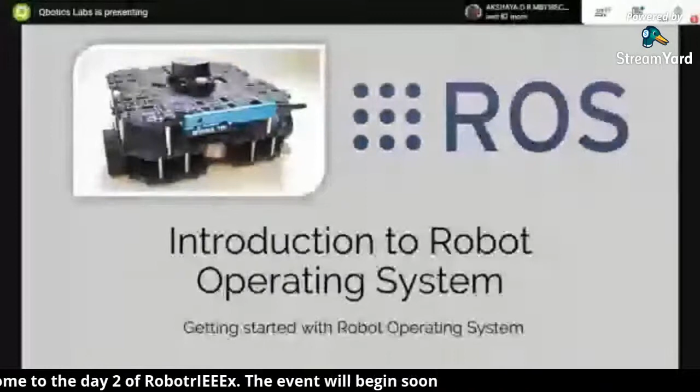So today we are planning to discuss about robot programming and a platform called Robot Operating System. I'm planning to make this session as interactive as possible. In the Google Meet you have the chat box. So what you have to do is when I ask some questions, you can comment it, instead of unmuting your microphone.

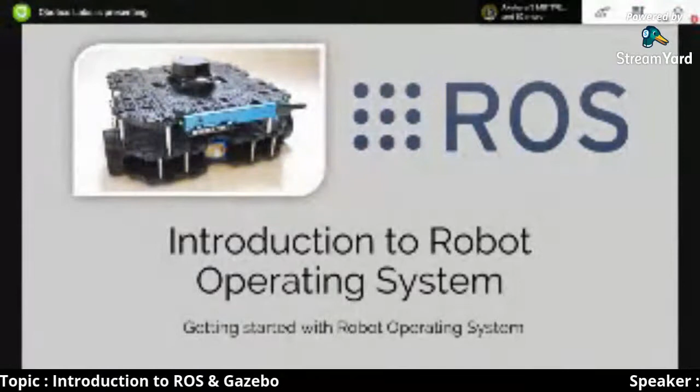I think already one guy is saying a hi, wonderful session. Oh, I think he already grabs all the topics of this talk. I think anyway, I hope the people joining this talk may be having some interest in robotics.

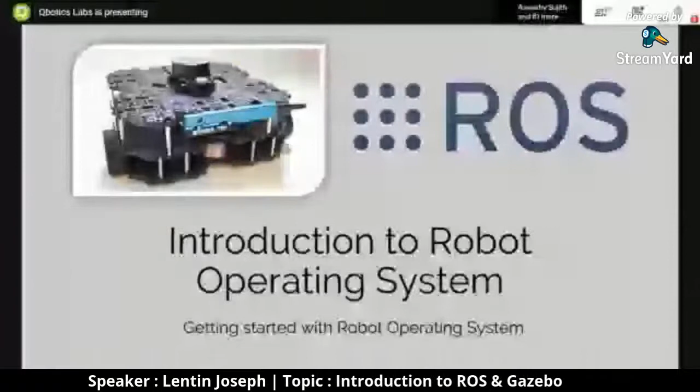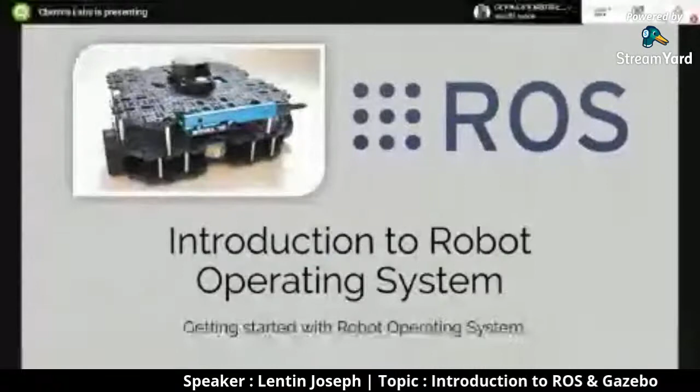I will ask a few questions during the talk, to make this talk as much as interactive. And I also want to take 15 minutes for the Q&A, because this topic, robot programming and robot operating system, is a vast topic. So I'm only giving some introduction on this topic today. In the Q&A session, you can ask more questions related to your project. You don't need to limit the questions to robot programming and ROS. It can be anything related to robotics, okay?

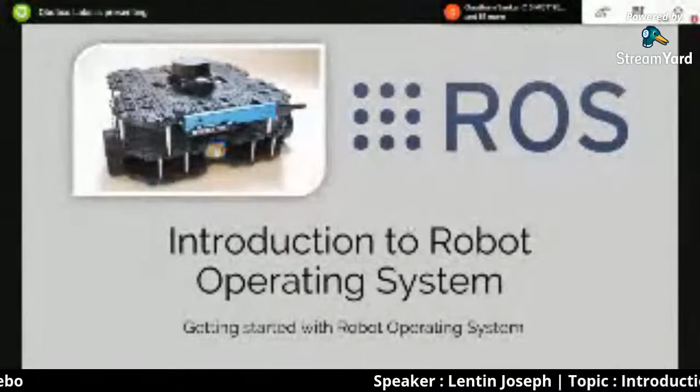Yeah, now we can start. So just an intro about me. My name is Lentin Joseph, and I'm working as a robotics software consultant. I'm running a company called Qbotics Labs, in Kochi, and I have an online blog called Robocademy.

Mainly, I'm sharing tutorials regarding robotics and robot programming. Then I have a few years of experience working at some robotic startups, as well as Carnegie Mellon University in the US, for some time. Then I have a masters in robotics, and I also spoke at TEDx. I have written 8 books on robot operating system, mostly related to Python, C++, ROS, OpenCV, those topics.

So these are some of my books: Robot Operating System for Absolute Beginners, Learning Robotics using Python. Mostly the books are related to ROS programming. And these are some of the books I reviewed. I didn't include all the names, but these are some of the titles.

So I'm planning to give an introduction to robot programming and introduction to ROS. Then we can see some of the steps for installing ROS, then ROS architecture, communication model, client libraries, etc., if we have enough time, then we can cover all those topics. And at the end of the class, I think I can show you some demos also. So that is my plan.

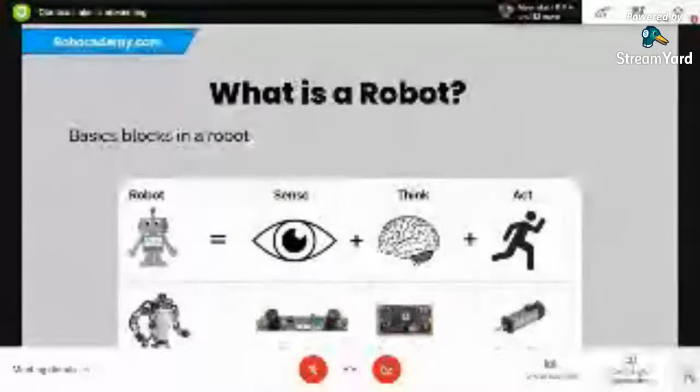Okay, so let's start. So how many of you are already working with a robotics project? You can put the comment in the chat box. Just let me know how many of you are working with a robotics project or with some kind of robots. Let me know. I think there are 84 people. So is there anyone who already works with robotics, or how many of you are interested in learning robotics? Just give a comment. I think nobody's commenting. Yeah, it's coming.

I think few of you are interested. I think I'm only getting 2 comments. Okay, fine. So I assume that some of you have interest in learning robotics.

So I can start with the basic blocks of robotics, robot mainly. Yesterday, I think you already covered the basics of robotics, robots, and there was a live session yesterday, right? But I just want to start from here. So the main modules of a robot are: it will have a sense block, a think block, and an act block. The sense block consists of the sensors, meaning the cameras, then the depth camera, then the lidars, laser scanners, etc.

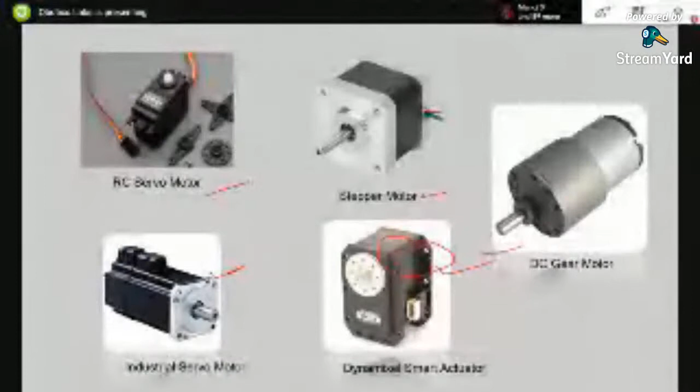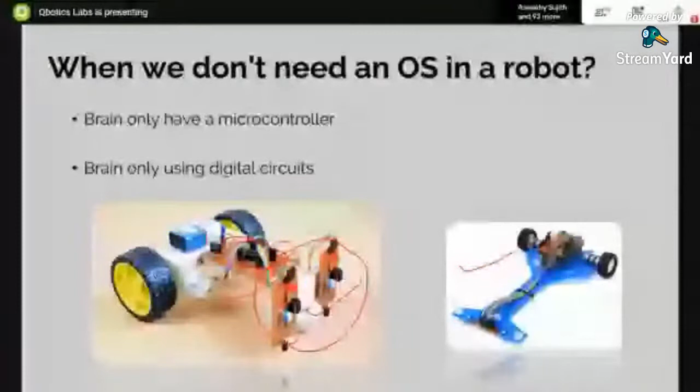So in this case, do we use a fully fledged computer or laptop? No, right? We only use some microcontrollers.

But if you are working with a complex robot, for example, the popular robot that I can say is Asimo from Honda. I think you might have seen Honda Asimo, which is a humanoid robot that can do most of the functionalities like a human being. Or you may have heard about Sophia, that is again a popular robot. So those robots we can say are complicated or complex because they have two robotic arms, then a head, and some sort of intelligence.

So in those kinds of robots we may need more computation power, not only microcontrollers but also a PC. It may be a workstation, it may be a single board computer, it may be a mini PC like Intel NUC. So there may be a PC along with the microcontrollers.

And inside that there will be some operating system, obviously. So inside a PC, there will be an operating system, right? So I'm just saying there are robots which only work with microcontrollers or digital logic circuits, or with a PC, fully fledged, maybe a laptop or a mini PC or something. In complex robots, a PC may be acting as the robot's brain. The reason is there are a lot of computations to perform, so that's why we need a PC.

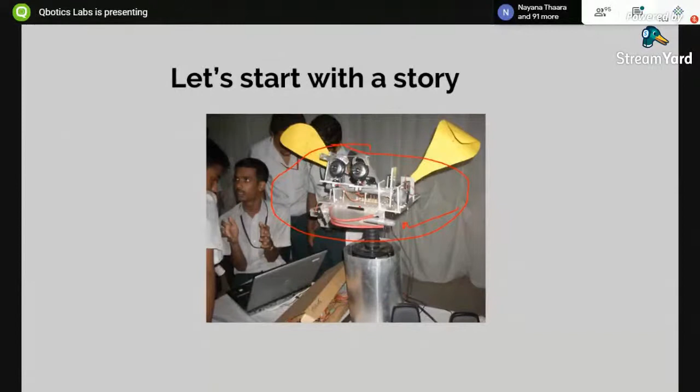So it's like an animal kind of head, with two eyes. There are lips here, these are the ears, there are two ears, and this head can move. You can see a laptop here, two speakers, an embedded board here, and another laptop here. So this was my final year project, and this was me when I worked with this project.

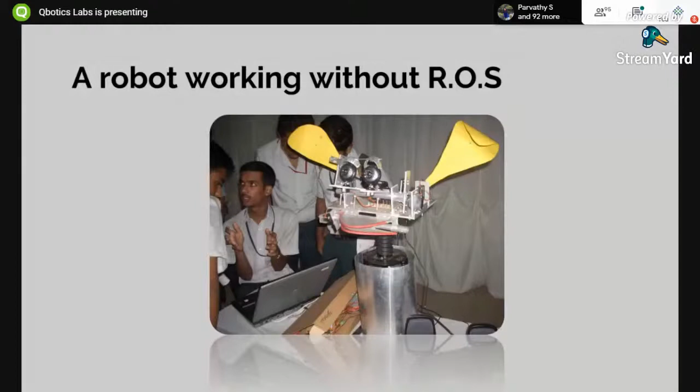This robot was not powered using ROS. This was the configuration: it has 12 RC servos, 2 laptops, and 2 cameras. There was a provision to interact with people using AI, speech recognition, face detection, and motion detection. I used Python and C++ to program.

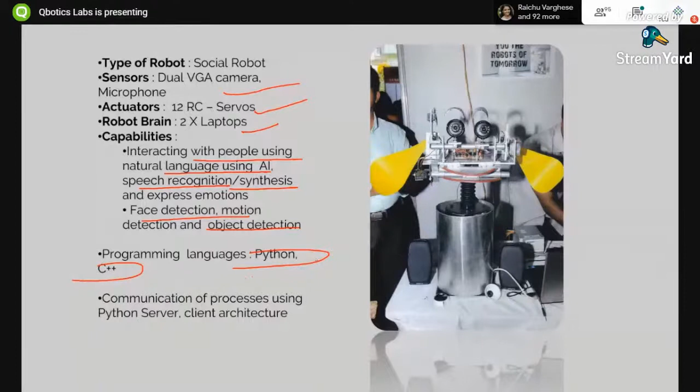This pic was taken during an exhibition. So this was the main challenge I faced. Simply, there are different programs running on these two computers. You don't need to worry about the names - I can simply say there are different programs, like one for face detection, one for motion detection, one for artificial intelligence. So there are different programs running.

And these two programs are running from different systems - I mentioned there are 2 laptops. So how do these programs communicate? At some point, the face detection program has to send commands to the AI program, and the AI program should send commands to an Arduino program. The Arduino program commands the robot, and it will move. So I have to establish some connection between these programs like this.

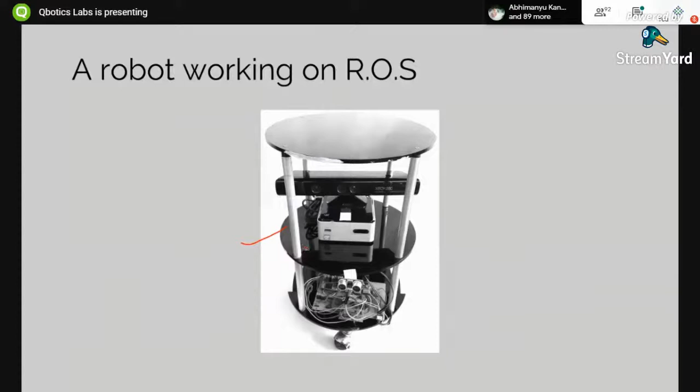So the issue was - you can see the components, like this is the Intel NUC that I was talking about. There is a depth camera here, and there are some embedded boards here. So these are the main components.

And the function of this robot is it can go from A to B. So this is a point called A, and if we command the goal position here, this is B, then the robot can path plan and avoid obstacles and reach B. I used ROS and Python C++ programming.

So when I used ROS, I could solve all the issues I faced during my final year project. The main thing was I could solve the inter-process communication - that's the term we use for communication between two programs. Using ROS, it provides an easier way to communicate between two programs. So that is a main application of ROS.

So you can just recollect the points I mentioned. ROS is a platform for doing inter-process communication. For example, you are running a program in C++ or Python called X, and you are running another program called Y, and also there is another program called Z. These programs are running independently.

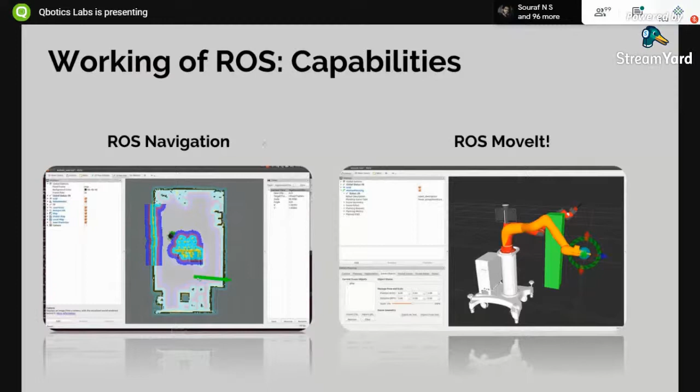I just want to show you some demos, then you can understand. The important capabilities of ROS are navigation and MoveIt, so let's show a demo first. Let me reduce the volume since it's a video. First, I want to show you the navigation demo—this is a simulation, a Gazebo simulation. You've seen what Gazebo is, it's a robot simulator.

In this demo, you can see a robot being used in a warehouse. You can publish a goal position, command the robot to go to some position, and the robot will go there autonomously. So this is the goal position that you have commanded.

So what the robot does is create a path from the current position to the final goal position, then it will avoid the obstacles. There is a virtual wall here, meaning there's no physical wall, but you can add one virtually, and it is avoiding that and reaching the goal position.

A lot of students are doing this autonomous robot project with some other application. In order to do this, you don't need to code at all. It's all about taking this navigation stack and customizing it. ROS already has these features, you just take the package, customize it, and it's ready to go. So this is one capability already available with ROS.

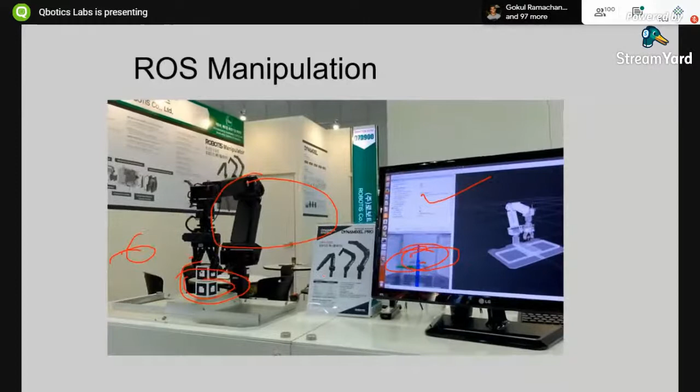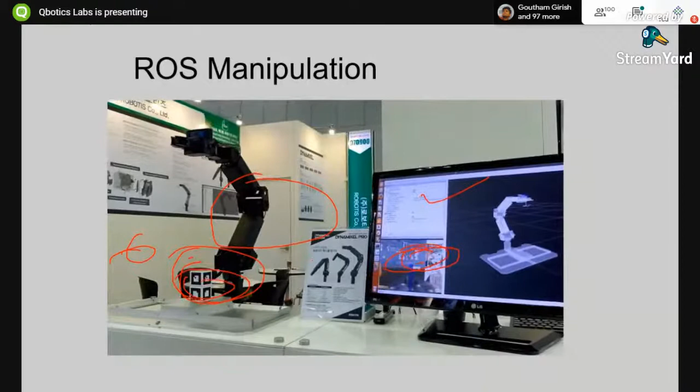These things can be implemented using ROS. It's not difficult, you can customize it like the navigation stack. So if you want to implement this kind of stuff, you don't need to write your program from scratch, you can use ROS.

What is the purpose of creating a 3D obstacle map around the robot? The purpose is that if the robot moves from A to B, say taking an object from A and putting it in B, if the robot doesn't know about the environment, it may collide with it. Because when the robot plans its path from A to B without knowing the environment, it can collide. So the perception stack in ROS gives the ability to perceive the environment, so the robot can see it and avoid obstacles.

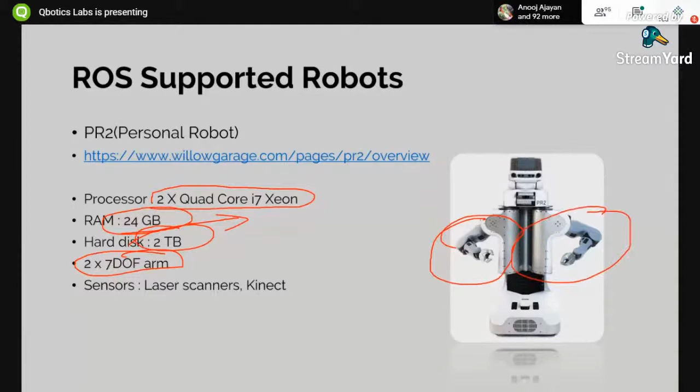This is ARM, and it has a lot of sensors - this is one sensor, this is another. And this is the Turtlebot, another cheap alternative in order to learn ROS and do research. So these are other robots supporting ROS.

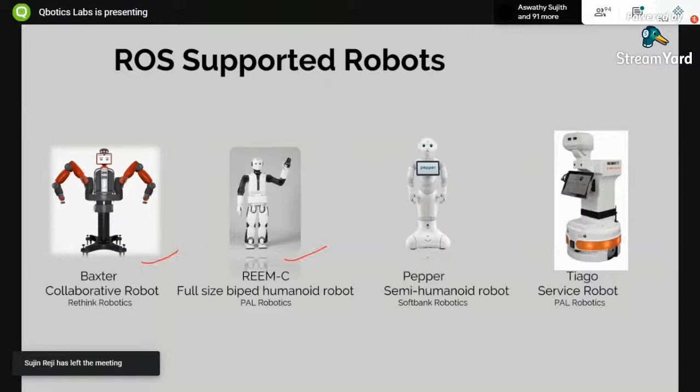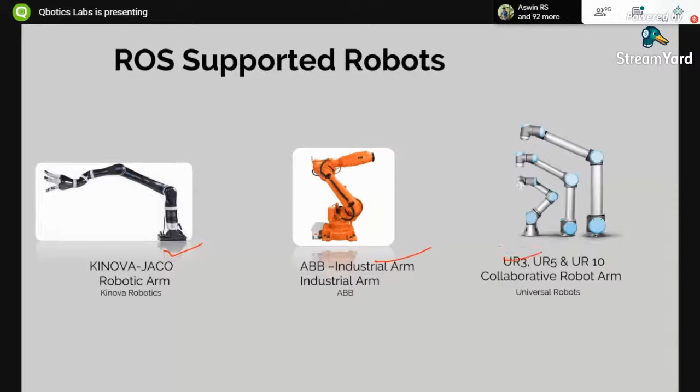I'm planning to show you a demo that was created using the ROS framework and executed on the PR2 robot. Let's start. I'm just muting the audio.

The basic idea is these engineers are working in Willow Garage and they need beer, for chilling. So they created an application. The application is simply fetching the beer from the fridge. And who is doing the job? The robot does. Let's watch this demo.

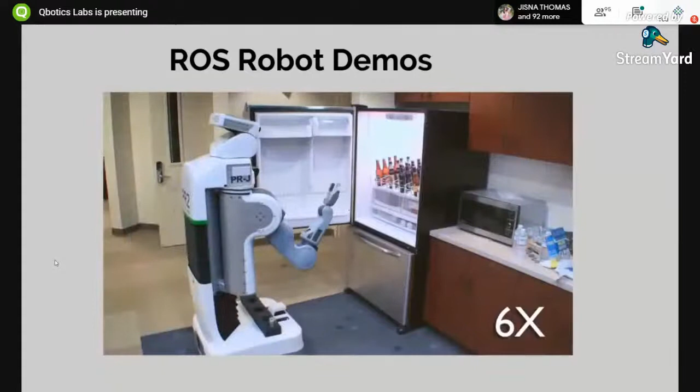So these guys are creating software using ROS. If anyone needs a beer, they can order it, and the robot will deliver. This is a beer ordering interface - you can see it opening the fridge. All these things are being done autonomously, and the robot is taking the beer.

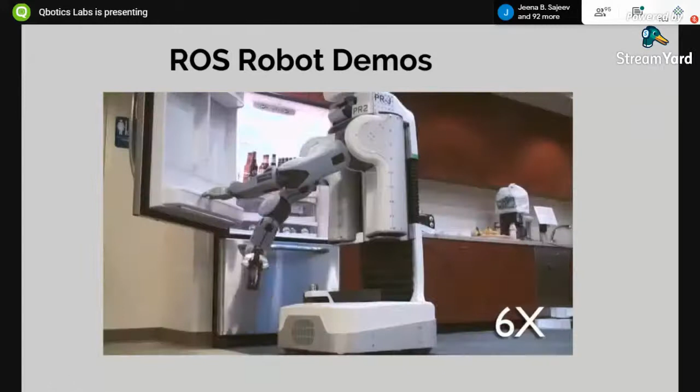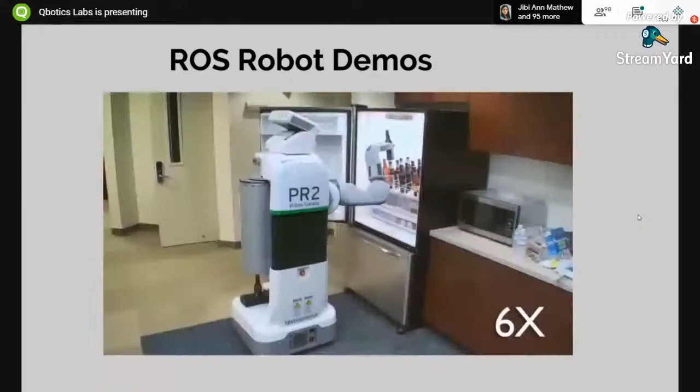Just check, it is running on 6x speed. So it's opening the fridge for maybe 5 minutes, I'm not sure, and then only it can take the beer. So don't try this at home anyway - this is only for demonstration purposes.

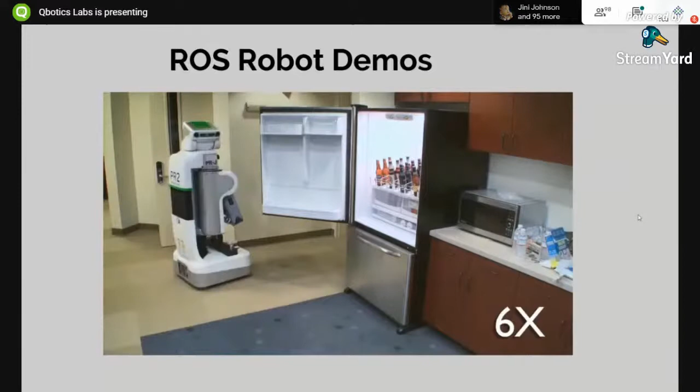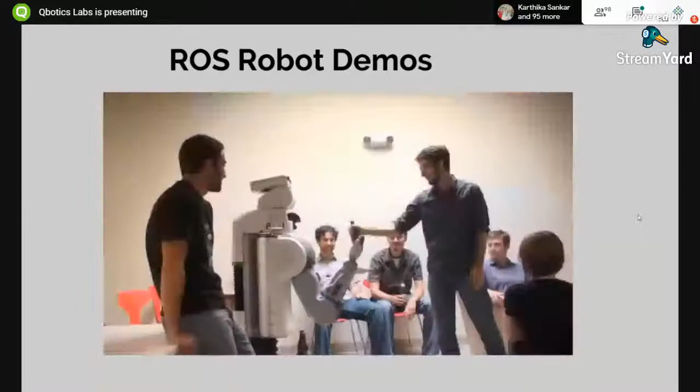After taking the beer, it is closing the fridge, then checking whether the fridge is closed properly. Then it's delivering. The good thing is that it can even open the lid - you can check, it can open the lid. Yeah, it can do much better than us, obviously.

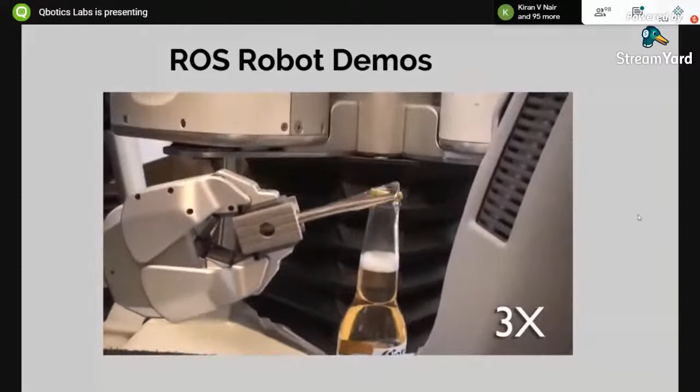Yeah, so this is a demo, and this is completely done in ROS.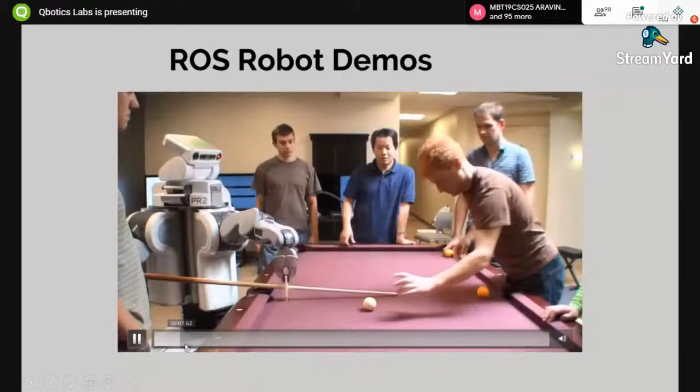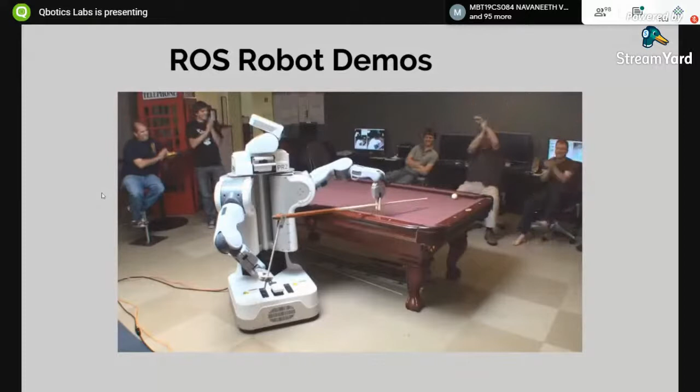Coming to the next demo, the pool shark. Basically, the robot is playing pool. These engineers created a software based on ROS, and using this software, the robot is able to play pool.

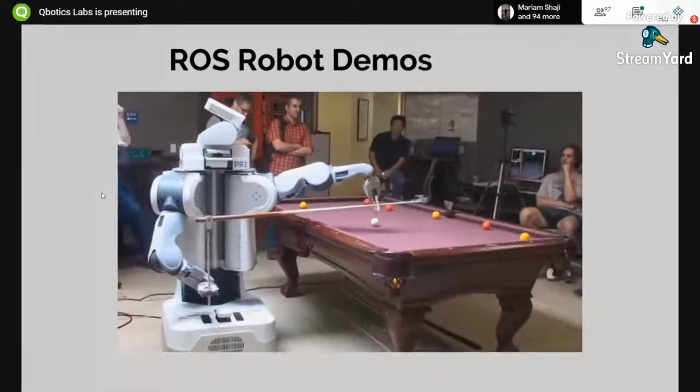And the good thing is that it's not randomly kicking the ball. Instead, there is a strong algorithm running in the backend that is detecting the balls. You can see the balls are detected, and it is planning the path.

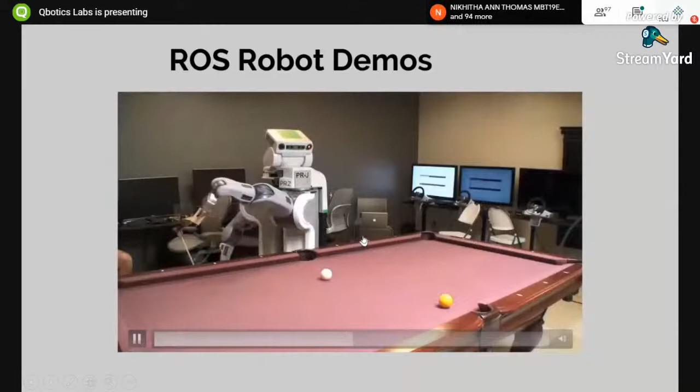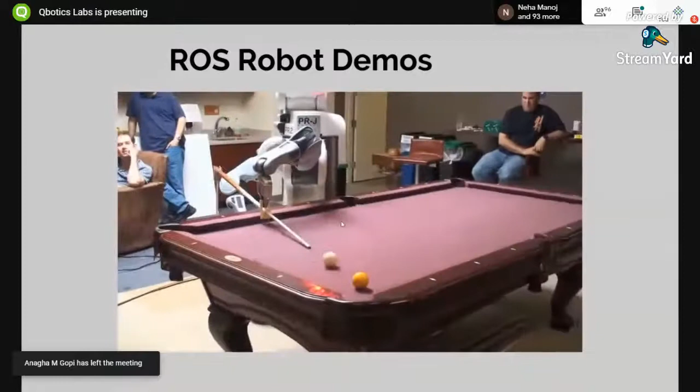This is the detected board with balls, and the robot can actually do path planning like this. It can iterate, it can simulate - like if it's hitting the ball at a particular angle, then where should the ball go. We can't do that, only a robot can do that.

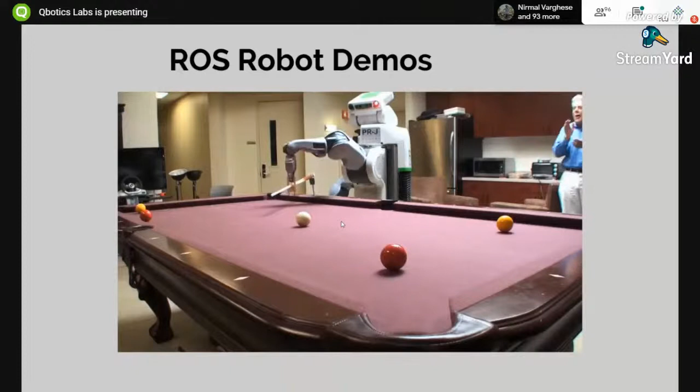So this is another demo, but the robot will fail at some point, obviously. So yeah, that is the pool shark.

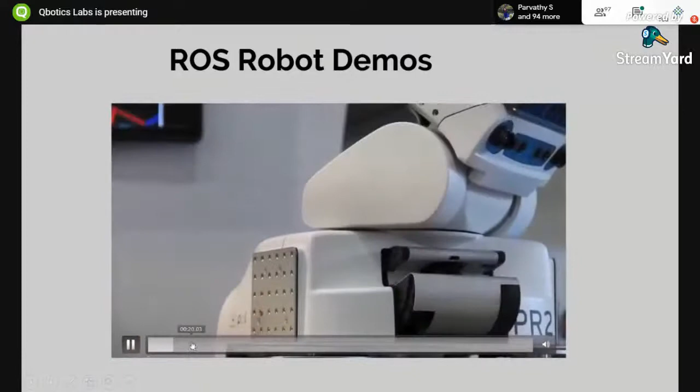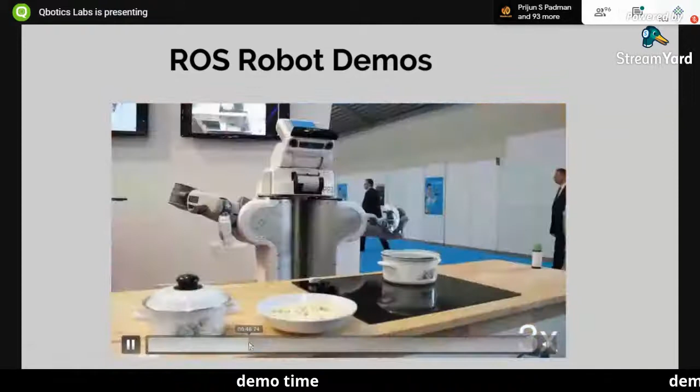Now, next demo, the PR2 is making popcorn. This is very interesting - these guys have done this demo during an exhibition. Basically, the PR2 will take the popcorn corn, put it in the heater, and prepare it.

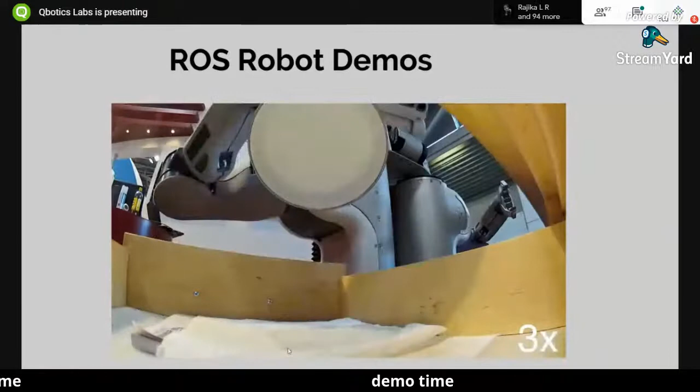You can see the robot is changing the knob and doing the work.

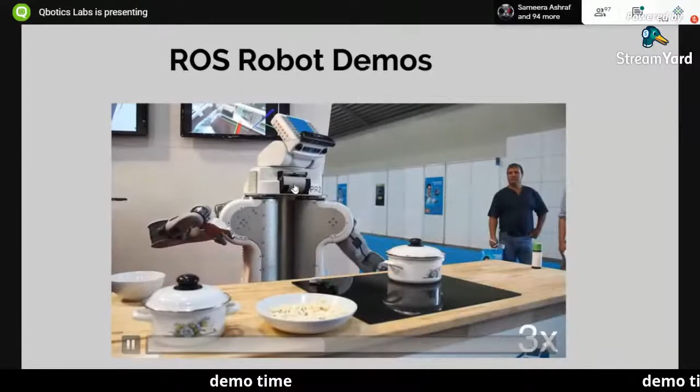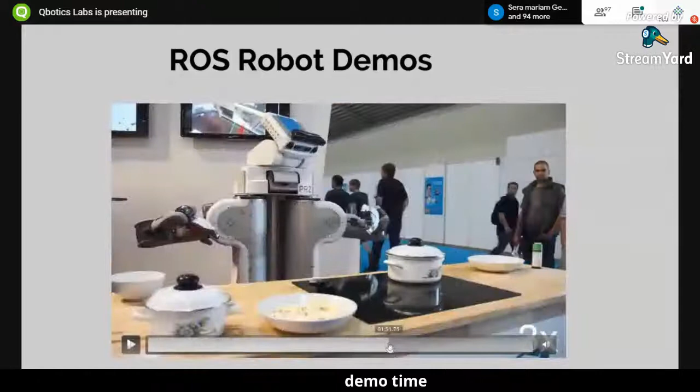Let me just seek ahead. So this is basically a heater, and you can see a sensor that is basically a laser scanner.

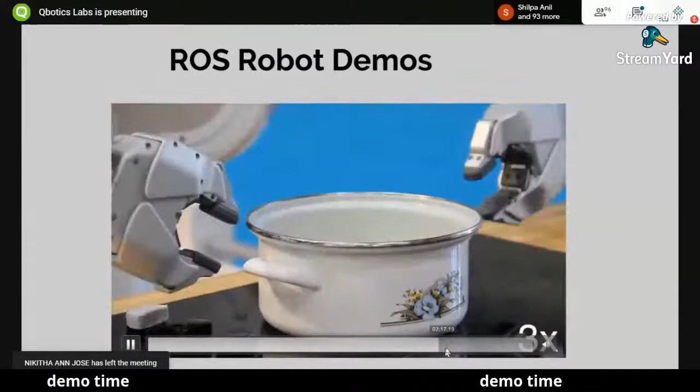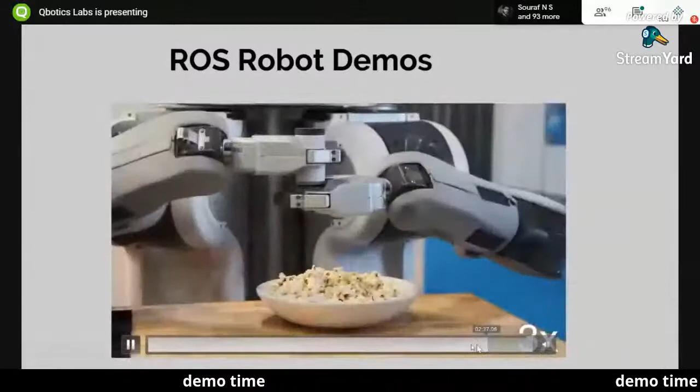Now the popcorn is ready, and it's taking it and putting it in. And finally, it will put salt on it. So these tasks, all of this demo, is done using ROS. So this is another demo.

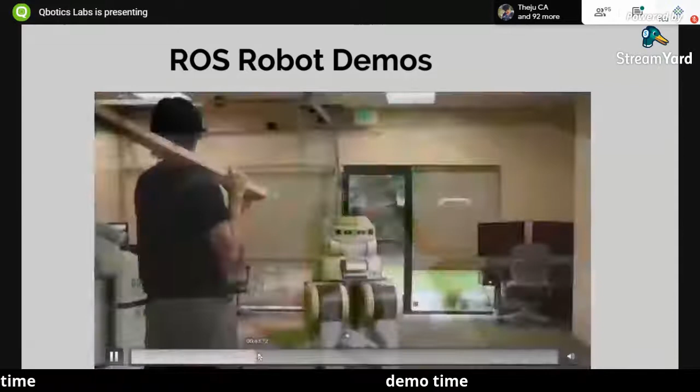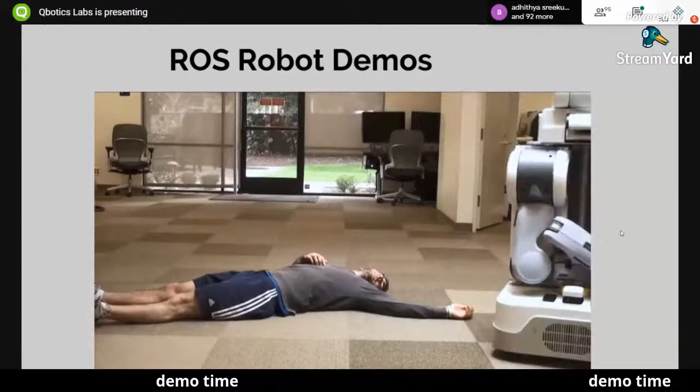This demo is of the ROS navigation stack. I can show you that the robot is moving autonomously, and what happens if somebody falls in front of it - it can avoid it autonomously. So this is again done using ROS.

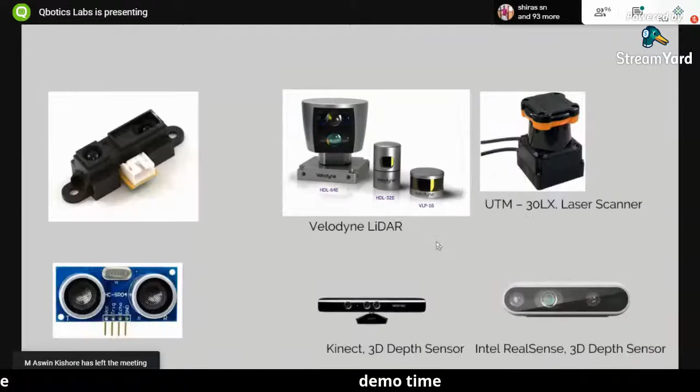There are a lot of demos, but I'm just skipping ahead, and I want to show you some sensors next - some of the sensors supporting ROS, and some boards. Now I'm going to the important section of this - how these programs can communicate with each other using this ROS functionality.

Regarding the future scope, software is a main, important aspect in computers and also in robots. Bill Gates actually transformed the computer industry, right? He released the Windows operating system, and also Linux transformed it. Similarly, ROS is actually transforming the robotics software industry.

So there are a lot of opportunities in research, and companies are looking for ROS developers, especially in the US, and in India also a lot of companies are looking for ROS developers.

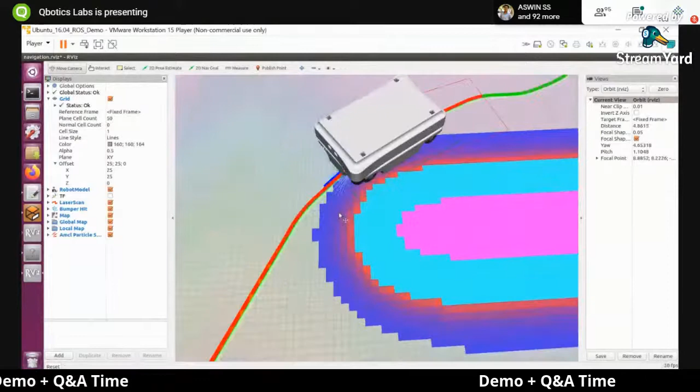So you can see the path planned by the robot. You can see a green path that is called the global plan, and there is a blue color which is the local plan. So you can see the robot is planning the path and moving over the path, and it's reaching the destination.

So these kind of projects can be done using ROS. Let me put the goal position here, inside the room. Let me see what happens.

See, it's planned a long path. And you can see the robot is moving in simulation. Maybe I can put a random obstacle here. Let's see what happens. So it's detected that obstacle.

Actually, it should automatically avoid that obstacle, but you have to fine tune it properly. I'm not sure what happened for this robot. So you can find the obstacle here. It's taking a different path in order to avoid that.

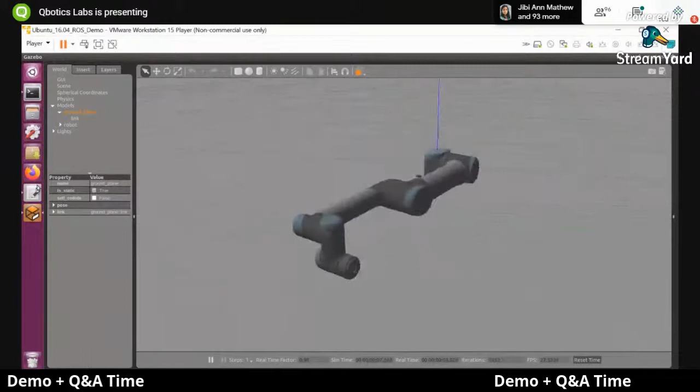So this is a robot arm called UR5. You can see the simulation here. Now I'm starting the other stuff, like for doing motion planning and everything.

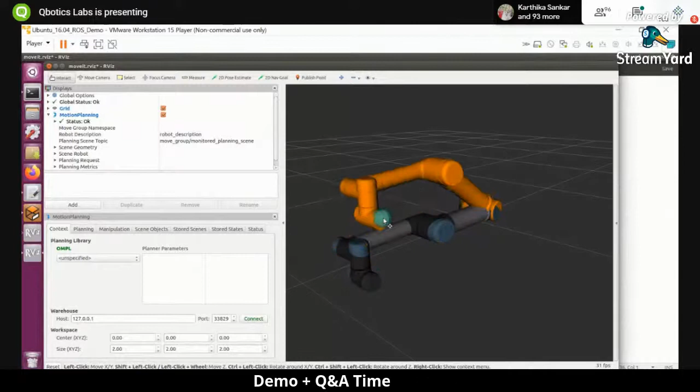So now RViz is popping up. You can see the robot model here, and now you can do the motion planning. It's very simple - just press here, this is the end effector or gripper of the robot. Just move the end effector to a goal position, and then you have to do the planning.

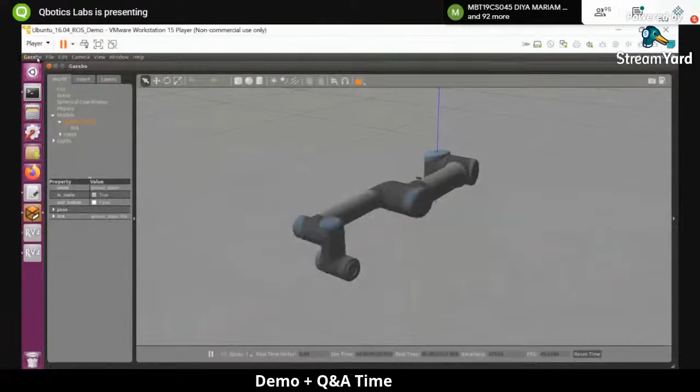Let me show you how the simulation works. So here is the simulation robot, and if you press plan and execute, it will execute on the simulator robot. And if it is an actual robot, this will execute on the actual robot. So you can move the robot here, then do the plan and execute, and it will move.

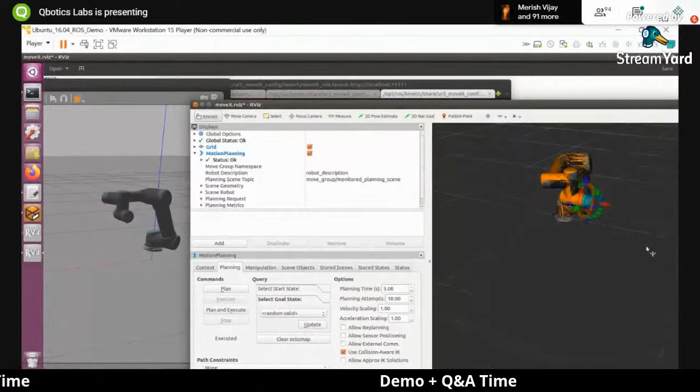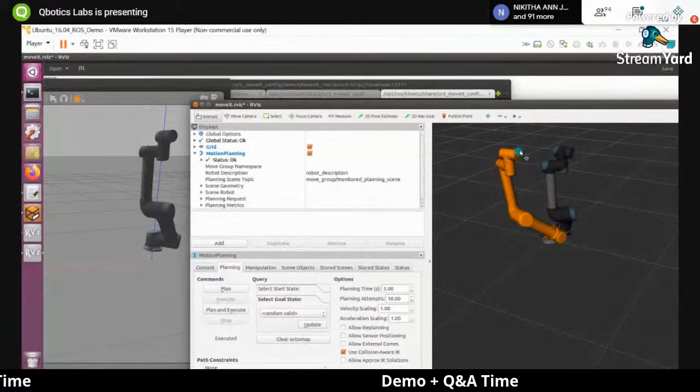So basically we are doing inverse kinematics - you might have heard the term IK. We are setting the goal position and the robot is moving to that position. There's a lot of math involved to achieve this, but ROS has all the features, so you can simply do this without any coding.

So these are two things - manipulation and navigation. Let me close that. And finally, I have one more demo, which is again a mobile robot.

This violet or blue color indicates the obstacle. So if I give a goal position here, you can see the path is slightly curved because it is avoiding the obstacle. So Agil is asking, is RViz included with Gazebo?

So Agil, Gazebo is a simulator, and RViz is a visualizer. So RViz is actually a tool, Gazebo is actually a simulator. So when you install ROS, you will get RViz and Gazebo.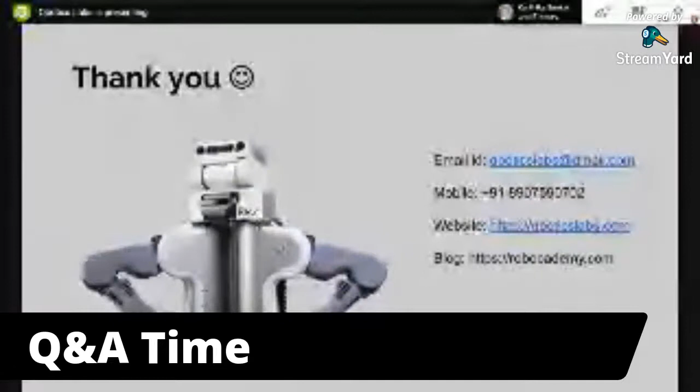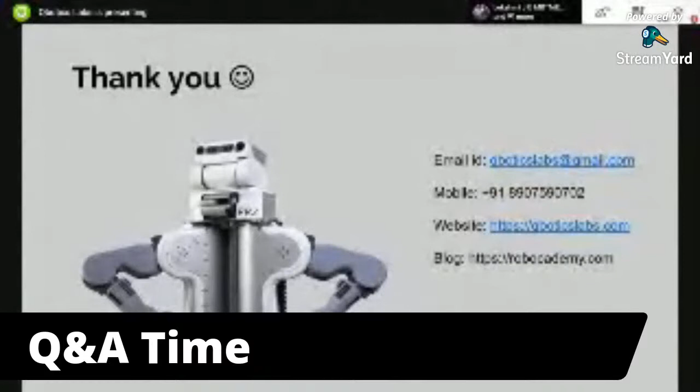Sir, there is a question in the chat box - what are the system requirements for installing ROS? Okay, then, what's next? Sir? Just stopping presenting. Sir? Sir, Kartika, you can proceed. I think I'm done with the presentation. Okay sir, sir, there's a question in the chat box.

Sorry, the mic was mute. Okay, yeah. The thing was the volume was too low. Yeah, now go on.

Sir, yeah, I can hear you. There is a question in the chat box.

What are the system requirements for installing ROS? Okay, so I'm seeing two questions. The first question is, what are the system requirements for installing ROS?